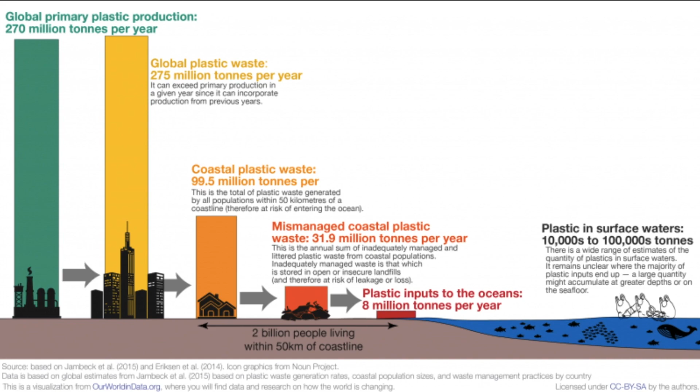Presenting Aqua Channi. Life without plastic is unimaginable. It's used in almost everything that we see. Unfortunately, plastic has various detrimental effects on the environment, such as choking of animals, pollution, biomagnification, and landscape disfigurement.

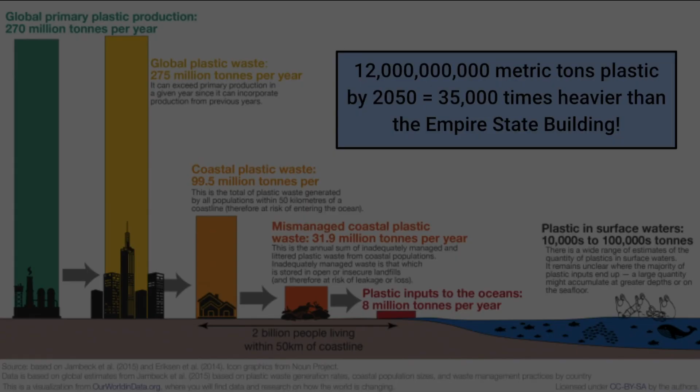Plastics contain toxic chemicals which lead to numerous health risks in organisms, such as hormonal imbalances, cancers, and a lot more. Even worse, the decomposition of plastic takes up to 1,000 years, while we produce over 300 million tons of plastic every year, of which only 9% is recycled. 80% of the plastic in oceans flows into them through rivers.

This is where the Aqua Channi comes in. The Aqua Channi will intercept plastics in rivers and prevent their entry into oceans while simultaneously cleaning up rivers. It will do so by filtering out both macroplastics and microplastics, which are often overlooked, using unique mechanisms. With the Aqua Channi, we hope to reduce plastic pollution and save our planet.

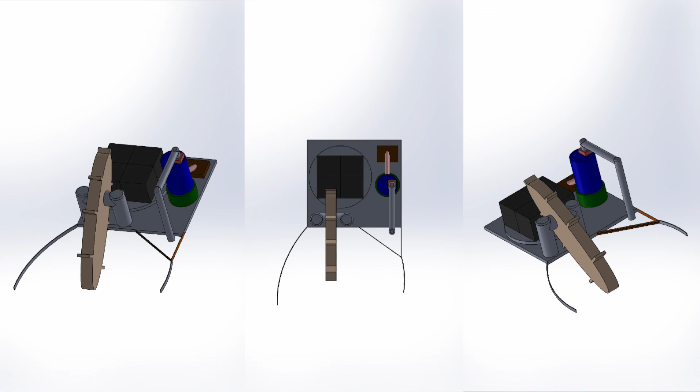The Aqua Channi is able to achieve this in a 7-step process. Strategically placed barriers along the riverbank and attached to the Aqua Channi guide plastics towards it, but do not block the path of passing boats. The sieve wall is a uniquely undulating net wall that is designed to prevent larger plastics from passing through and from clogging the wall. Thus, water containing only small microplastics less than 5 mm are able to pass.

These microplastics are then picked up by pipes opening into the microplastic agglomeration tank, where a series of chemical reactions involving the use of hybrid silica gel agglomerate the microplastics into large tennis ball-sized particles. Now coming back to the macroplastics.

From the sieve wall, they are directed towards the gyrating macroplasticator or GMP, which is our own repurposing of the use of conveyor belts for plastic collection seen in most other products. In this way, macroplastics are dropped into the dumpsters present directly underneath the apex of the GMP.

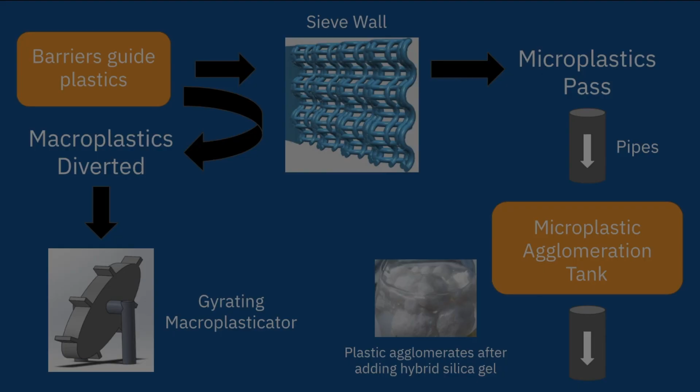To solve the problem of bringing each of the 4 empty macroplastic dumpsters beneath the GMP, we have designed a circular platform or barge that carries the dumpsters. The platform fits into the annular outline of the posterior wall of the Aqua Channi's main body, which has small wheels that move and hence rotate the platform by 90 degrees on receiving a signal.

Once all the dumpsters are filled, a message is received by local operators to collect the wastes. Since the macroplastic dumpsters are present on a separate barge, they are easily towed away by a boat, greatly reducing any manual work. The microplastic dumpster is fixed and so needs to be manually emptied. After the collection of the plastics, they will be sent for recycling.

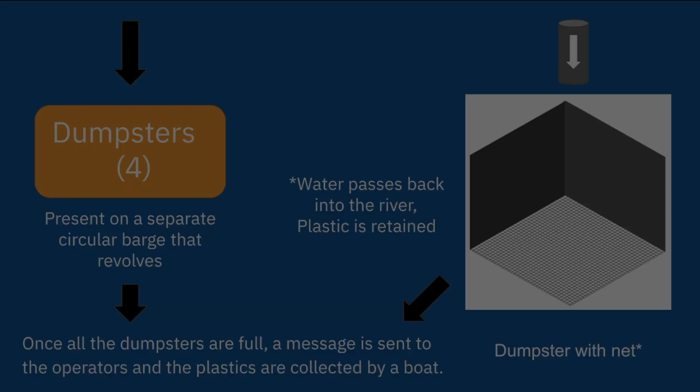We plan to do so by collaborating with the following organizations: Recycle India Foundation, MBA Polymers, and Renew Oceans. These organizations will help us by taking the plastic we've collected, sending them for recycling, and selling the products made from them. Our competitors consist of the Interceptor, the Bubble Barrier, and the Trash Wheel.

Some common problems faced by our competitors are that they're not able to filter out both types of plastics, or they're not able to operate at an efficient speed. What makes Aqua Channi better is that it's an all-in-one solution which can filter out both macroplastics as well as microplastics, and it can also facilitate microplastic agglomeration, which is a goal that our competitors are yet to achieve.

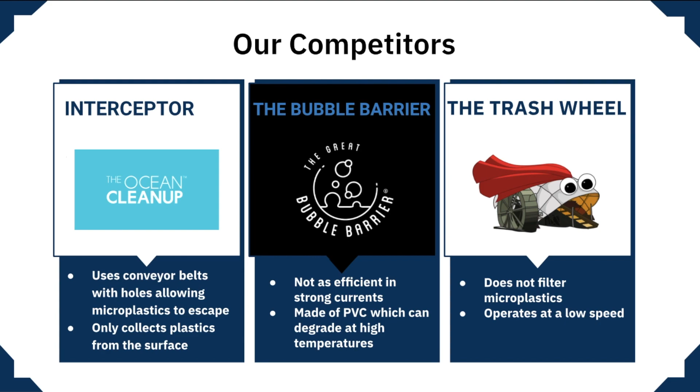The USP of the Aqua Channi is that it is adaptable to the needs of the target river, and the employed processes can largely be scaled up. Moreover, micro and macroplastic filtrations are not dependent on one another, meaning that if one requires repair, the other is still operational.

We plan to start the first round of funding in April 2021 and production by August 2021. We plan to raise $800,000 in the first round, which includes $670,000 as the build cost of Aqua Channi and $130,000 as the operational costs to kickstart the business. We will raise $500,000 in the second round to increase research and development and expand our business.

Our funding sources consist of venture capitalists, angel investors, and the Indian government. In the Indian government, we're targeting 3 ministries in particular. First, Ministry of Earth Sciences, second, Ministry of Environment, Forest and Climate Change, and the third is Ministry of Urban Development. Apart from these, we're also targeting organizations and companies like Vulcan, Morgan Stanley, and Alliance to End Plastic Waste, since they have a history of investing in projects which aim to eliminate plastics from the ocean.

Thus, Aqua Channi contributes to lesser plastic pollution in oceans and cleaner water for various forms of life.